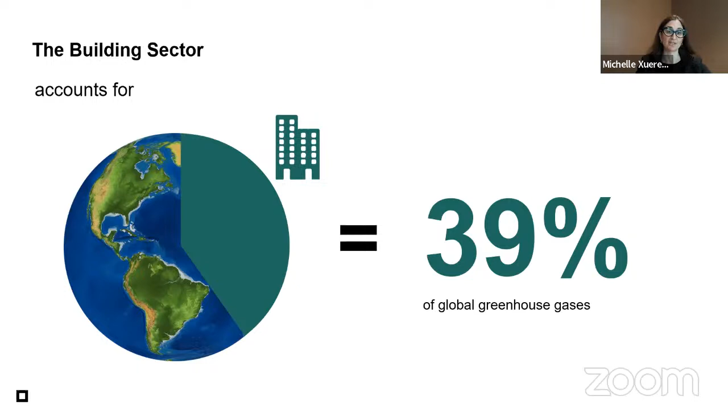Okay, good morning. You can see what I'm going to talk about here. Naama's already mentioned it, so I'll just get right into it. We know, being in the building industry, that what we do accounts for a huge amount of global greenhouse gas emissions. Buildings account for 39% of global greenhouse gas emissions, and 11% of that actually comes from embodied emissions. I'm going to park that for the moment.

Looking at what the World Green Building Council thinks we should do about this: their idea is that all new construction should be net zero operational carbon, that's the carbon it takes to run the building, by 2030. They also want to see a 40% reduction in embodied carbon, which is interesting because we haven't really been talking about embodied carbon until maybe the past 2 years, at least widely. Then by 2050, they want to see 100% of buildings, both new and existing, to be net zero operational carbon, which is just, wow, that's a lot. And they want 100% of new construction to be net zero embodied carbon. So that's a tall order.

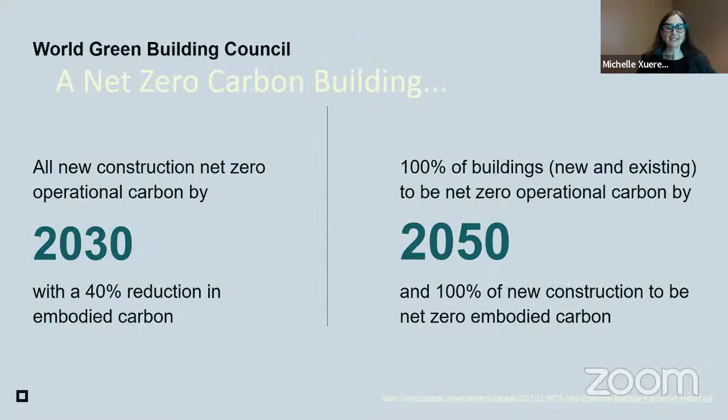So let's talk about this idea of a net zero carbon building and what that actually is. A net zero carbon building is a highly efficient building. What you want to do is produce renewable energy on site, or purchase that, or do a high quality carbon offset, and that's what's being permitted for the moment. You want to make that equivalent to what you're using, and you want that to be both from your operational carbon to run the building and your embodied carbon. So just a sidebar: embodied carbon is the emission associated with the materials in the construction process, and I'll get into more detail about that. Operational is the emissions associated with running the building itself.

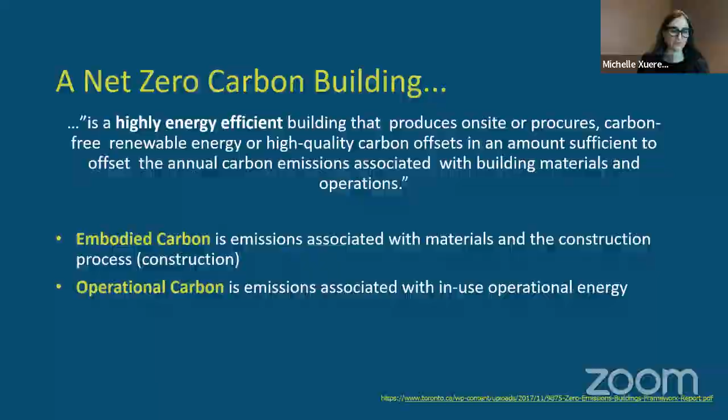So let's look at that visually, since we're very visual people. Net zero emissions means taking your embodied carbon, which is from the materials it takes to build the building and maintain it over its lifetime, and adding that up with your operational carbon, which is the carbon it takes to run the building - the fuel, that's the carbon emissions from the fuel to run it. Then you subtract from that the avoided emissions, which is your green power or any kind of carbon offsets. The idea is that you net out to zero. That's kind of the definition from the zero carbon standard from the CAGBC.

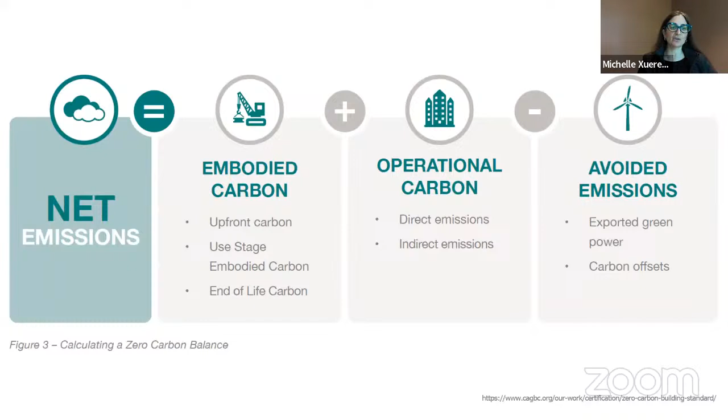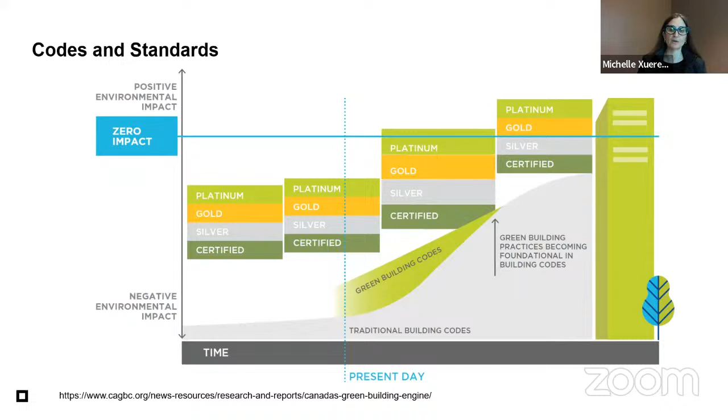Big picture, metrics to measure success in buildings are changing. What we have seen is that changing codes and standards have really given municipalities and regulatory bodies the confidence to go ahead and embrace higher levels of sustainability. So what we're starting to see is a push, kind of an upward cycle of increasing those mandatory requirements, and that has been ongoing and will continue to be.

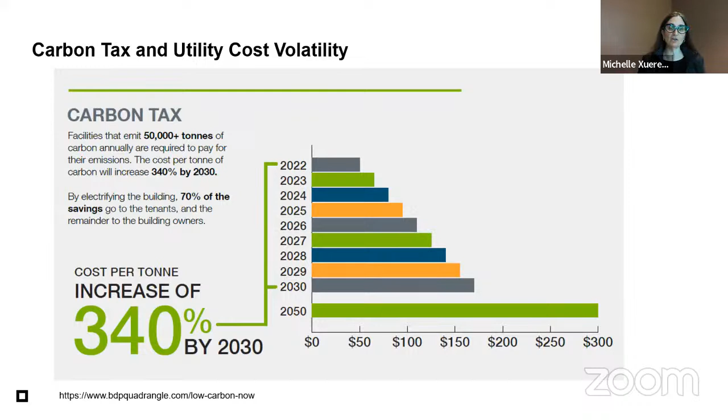The other thing we've seen is some volatility in the utilities we're paying, whether that's from global unrest, things like the war in Ukraine, or from trying to deal with climate change. We see tools like the carbon tax that have come into effect, where the cost of carbon is set to increase by 340% by 2030. So that's pretty significant, we're going to see big changes here. All kinds of indicators are pushing us in the right direction to take this seriously, even if the regulation isn't totally keeping up. And then you've got things like ESG reporting, which is really about investment. So if you're in a REIT, if you're dealing with pension funds, this has all become a part of it.

And it's something that has become tied to financial reporting. The governing bodies, the global governing bodies, are working to align the reporting of environmental and social governance against financial. So this is very important.

This is a huge regulatory piece that's underway globally. There's been some pushback in the US, but it's really taking shape in Europe. Then we see things like this building in the UK, which part of why the project was rejected was because of its embodied carbon. And I thought that was really interesting, because it's telling me that even if there are minimal requirements or no requirements, it's becoming increasingly risky to ignore these things.

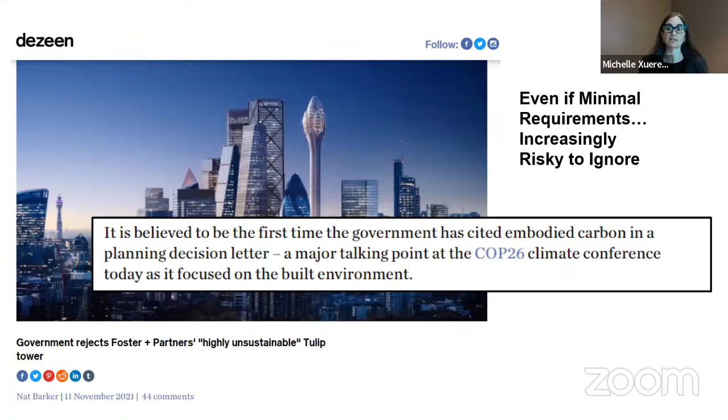So let's look at some of the response to that. You get things like green development standards. After signing the Paris Agreement, municipalities have been charged with reducing their emissions. This is something that came from the Atmospheric Fund when they did the carbon inventory of the Greater Toronto Hamilton area.

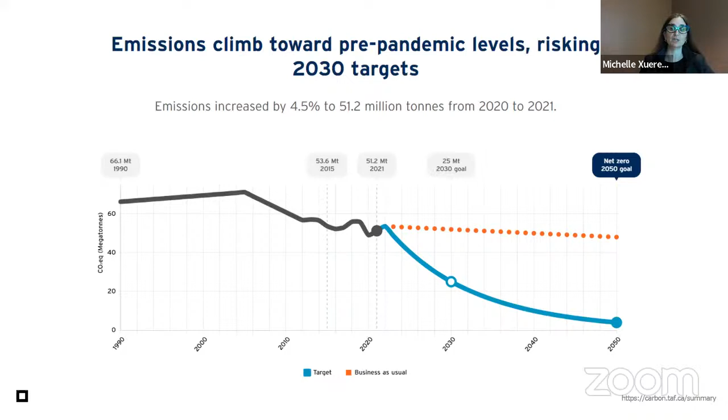You can see here that red is business as usual and blue is where they want to go. So what the municipalities are working to do is close that gap. And in a city like Toronto, where you have more buildings, the carbon impact is even higher. So what you get is a bunch of green development standards, and all of these municipalities have them.

But the one that's really been leading the way is the Toronto standard, which was based on the zero emission building framework issued in 2017. This was a pretty interesting piece in that they created almost like steps for how we're going to get to net zero, and I'm going to talk us through that.

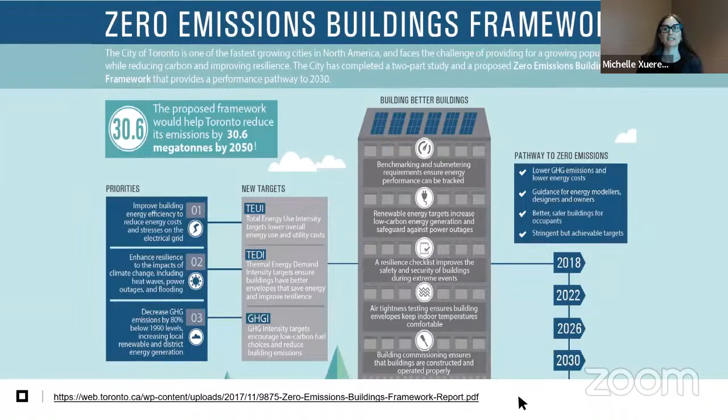So they created these absolute metrics and some other additional measures, and I'll walk it through. We're in Toronto Green Standard version 4. There have been 3 versions so far, so I know there's lots of confusion about the Toronto Green Standard. It came out in 2018, we were subject to version 3, and there were 4 tiers.

In May, we moved down to what was mandatory now dropping off, and what was optional has now become the mandatory standard. So what you start to see is over the years, the lowest level starts to drop off, and you start to increase your requirements, so that by the time we get to 2030, the only requirement will be net zero buildings. And then they went a step further and sped up the timeline.

They said, okay, by the time we get to version 5, that's in 2025, and we want net zero by 2028. So what does that look like?

So if you're working on a project right now, the light gray and the dark blue are sort of pre-design, schematic design. If you're going in for your SPA application, which is what TGS is tied to, when you get to that, you may have already been working on the project for a couple of years. So it's really important to understand where these steps are going, so that something you're working on now, you can be planning ahead for where it's going.

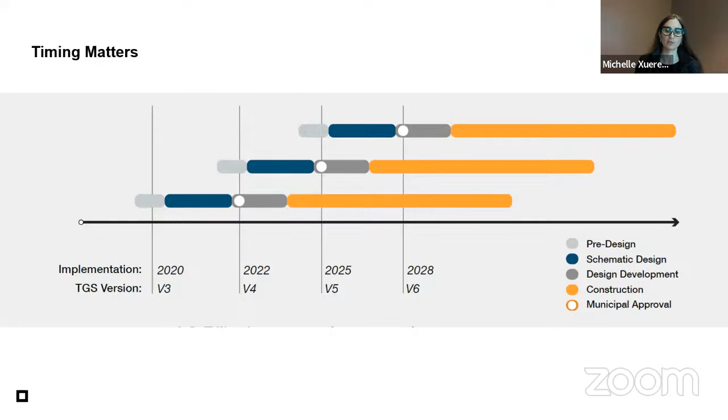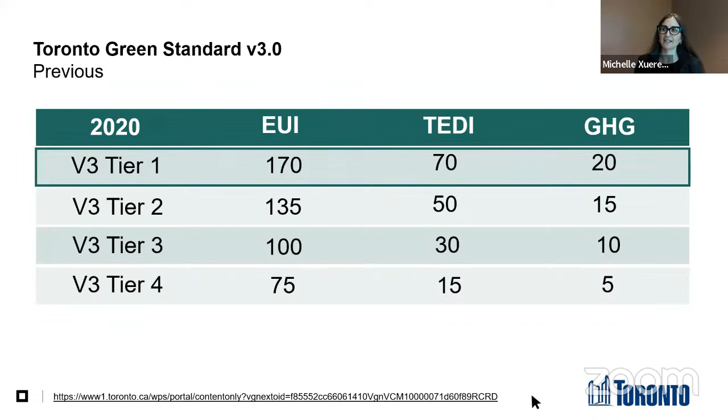So what about financial implications? There was a study done in 2017. This is fully about multi-unit residential buildings, and they were comparing to the building code. Now we're at version 4. So basically they were saying this is what's required, and this is about 3.5% more than what it cost in 2017.

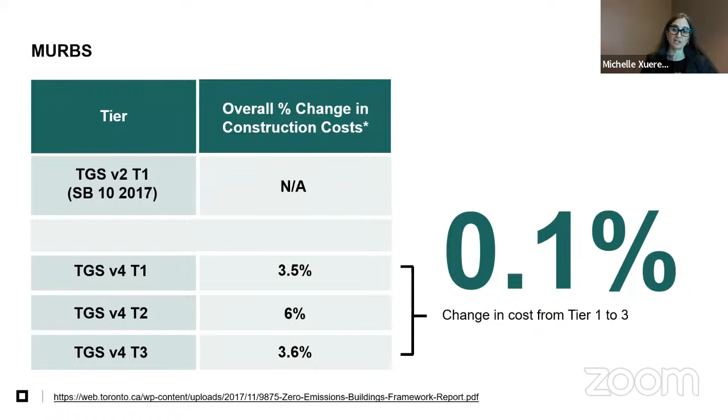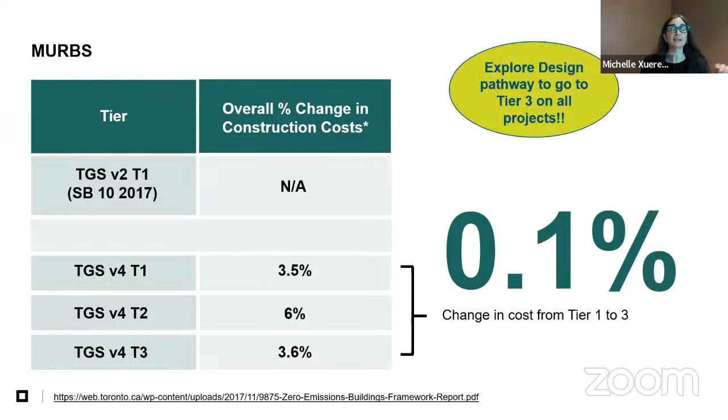This does not deal with escalation, just putting that out there. And the thought was that when they looked at it in 2017, getting from what is now tier 1, which is mandatory, to what is tier 3, which is voluntary, had less than a 1% difference in cost. So I find that very, very interesting, because it tells me that where we're at right now, we should be exploring the design pathway to go all the way to tier 3 on every single project, regardless of whether you're going there.

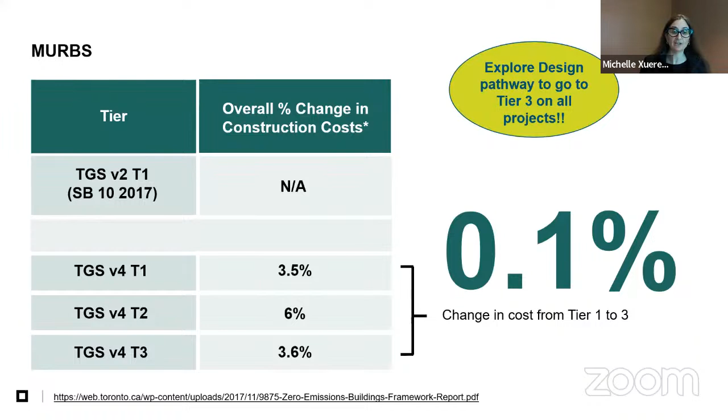Exploring that pathway is really, really important to help people understand where it is we're going to end up.

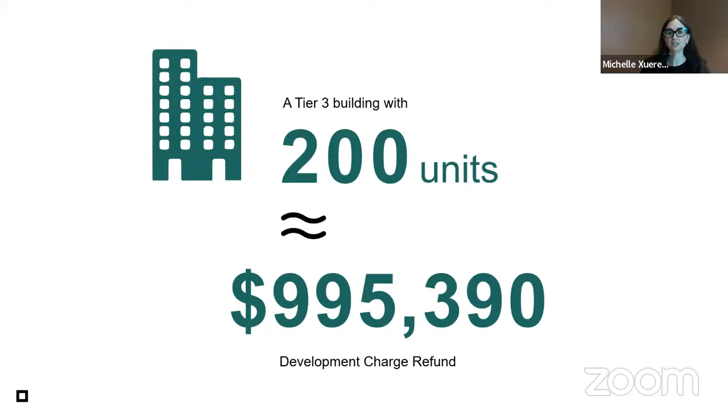Now the other piece that happens is development charges. Let's say we're looking at a 2-bedroom unit, you'd have to pay $55,000 in development charges. If you go for a higher level of performance, you'd get $4,000 or $5,000 back, depending on the version. For a tier 2 building with 200 units, that amounts to $829,000. Not insignificant. And if you go to tier 3, which is the one I'm recommending we explore, you're almost at $1 million in development charge refunds. So, money to be taken seriously.

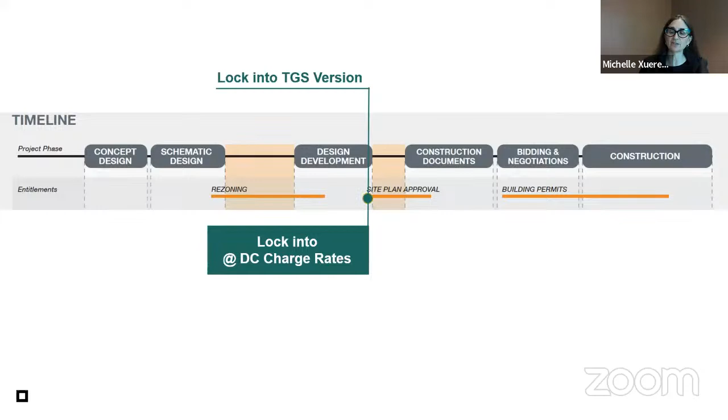So what does that look like on a design timeline? You lock into your version of the Toronto Green Standard when you apply for site plan application—that sets the rates you have to pay, your development charges. You pay those when you go in for your permit, and then you receive your development charge refund back at the rates that are current when you prove compliance to construction.

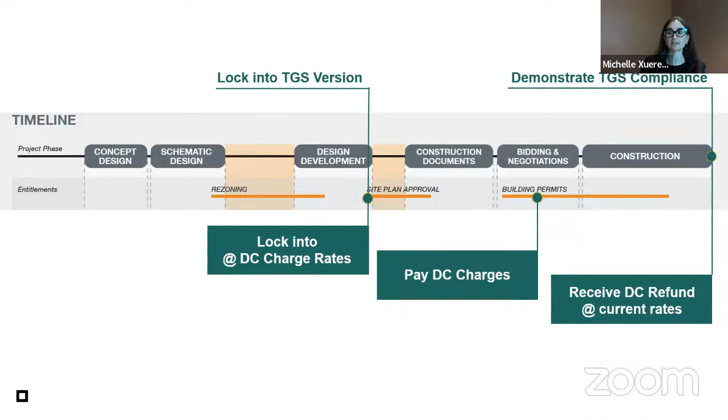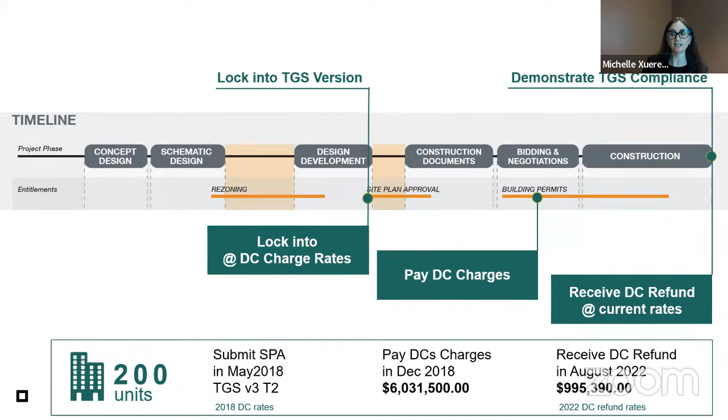So back to our 200 unit building: if you had submitted for SPA in May of 2018, you'd be subject to your version 3 costs. Your development charges would be around $6 million, and you'd receive your refund of close to $1 million in August of 2022. Not an insignificant percentage of what you're already paying.

When we expanded that search to look at even higher performing projects, things like Passive House or the Zero Carbon Standard, we found only about 5. And those were really in the affordable housing side or in the university market. Again, kind of interesting.

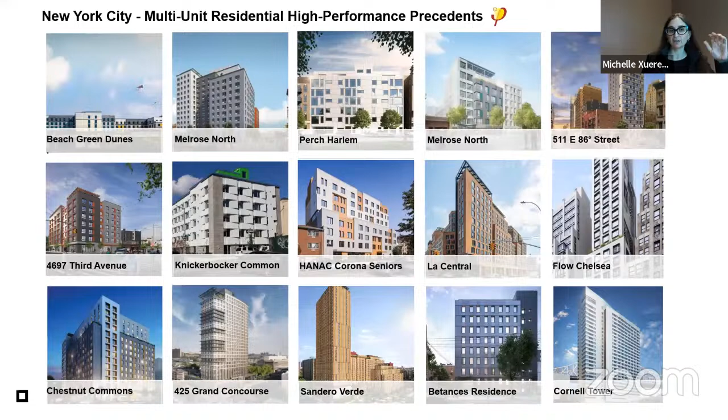Now where I thought it was really interesting was New York City. This is where we're starting to see the first real wave of high-rise passive house towers—a whole bunch where you can see the architecture overwhelmingly starting to change: punched windows, no balconies. Since Hurricane Sandy, New York has been really advanced and proactive in moving their environmental performance requirements ahead. They've now put in this local law 97 that sets emission targets for buildings and requires people to report out and pay the difference. They're given a limit to how much they can use, and they have to pay for every bit they go above. Signs of things to come.

So we put together a little think tank to discuss how we were going to accelerate net zero with this group of companies, because there was a lot of frustration—why can't we make this happen faster? We said, what if we put together 3 steps you can do on every project? So we put together this study called Low Carbon Now, where 8 companies got together and shared what they would do. We made a short video and an infographic, which you're welcome to check out after.

One of the things was really about this decision-making process that happens right at the beginning, which is so challenging on residential projects given their stop-start nature. But we do know that any decisions you make in this upfront planning process set the carbon trajectory for the building for its lifetime—what it's going to be in embodied carbon, what it's going to be in operational carbon, shown in blue. So try to make those decisions wisely at the beginning. This graph also demonstrates the time value of embodied carbon.

Usually you talk about embodied carbon over the life cycle of a building. If you looked at it over 60 years, it would maybe be sort of 40% of the total carbon of the building. But if you look at the fact that we're trying to reduce our emissions by 2030, just looking at that time span, embodied carbon emissions are actually valued at about 85% of the emissions. So as we're building these buildings, they have a massive impact.

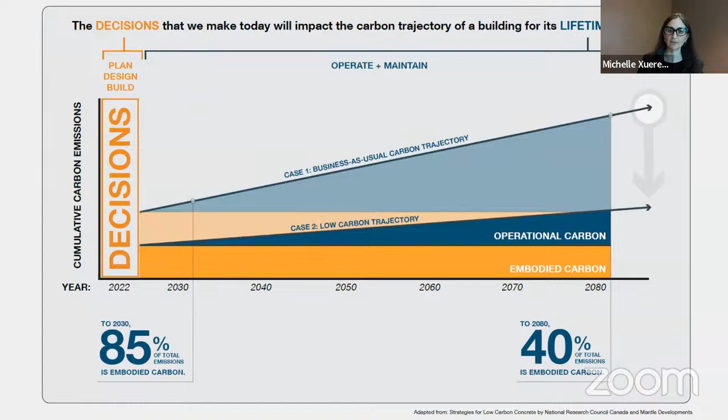So the 3 things we said we should do for low carbon buildings: 1, build smarter structures; 2, prioritize the building enclosure; and 3, electrify your heating systems. We're going to get back to that.

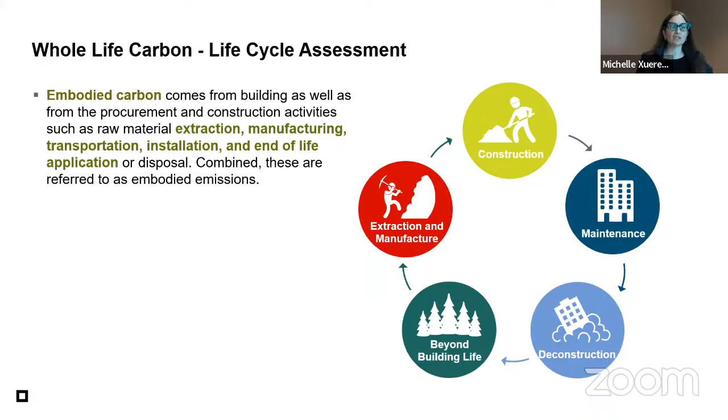Let's talk a bit about embodied carbon. It really comes from the materials through their entire life cycle, through extraction, manufacturing, transportation, installation, and what you do with them at end of life. You've probably seen these charts before, they can be quite confusing - people talk about A1 to A3 to A5. We did a range of studies that are really just about this front end, the product and construction phase, knowing that the majority of embodied carbon impacts come in these first phases.

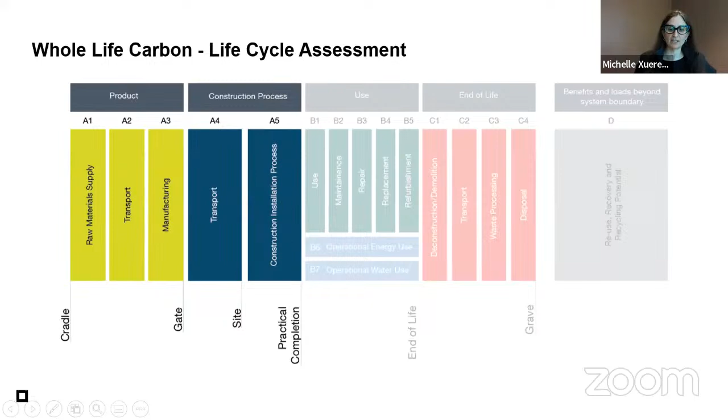We've only been having this conversation really widely as an industry for maybe the last 2 years, and tons of literature has been published about it, which I find really interesting and exciting, because we're realizing that embodied carbon is actually the elephant in the room.

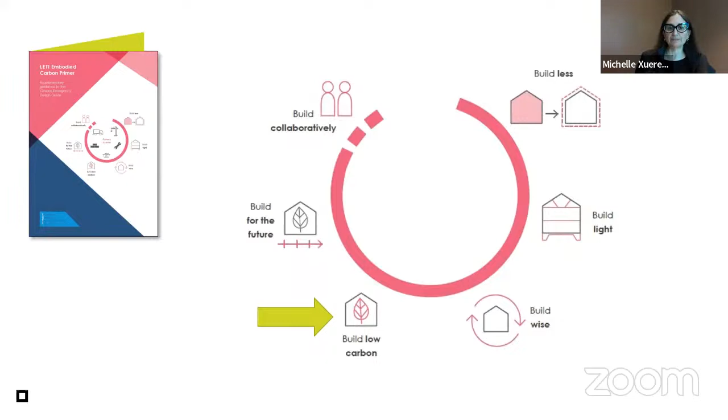Probably the most advanced, in my opinion, has been LETI, put out by the City of London - the London Energy Transformation Initiative. This is an amazing guide. They've set benchmarks for all buildings in London and things to do, and are working on adjacent legislation. One of the pieces: build less, build light, build wise, build low carbon, build for the future, and build collaboratively.

So one of the things that happened here in the City of Toronto is we pulled together a group of people that said, well, we need to look at what are the benchmarks. We keep saying a 40% reduction in embodied carbon, but 40% of what? So Kelly Doran had done a studio for University of Toronto, one of our projects was part of it. We took the results of that, went to speak with the City of Toronto, along with Mantle Developments, and managed to secure some funding from the Atmospheric Fund for the City of Toronto to do a benchmarking study of buildings in Toronto.

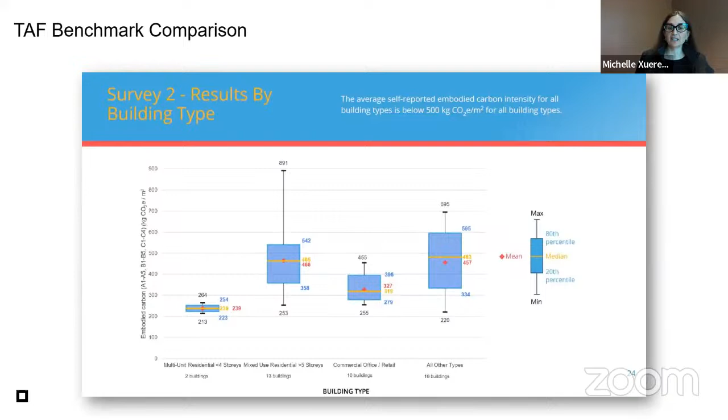What they found was they did a call out to many practices within the city to ask, have you done any embodied carbon studies, any LCAs, and can you give us the results? They took that and benchmarked the median. Out of that, they provided this regulatory embodied emissions of buildings - a policy primer for municipalities to talk about how they might go about regulating it.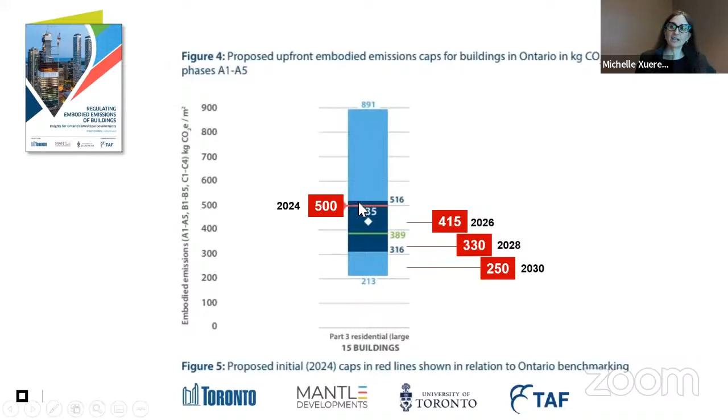And what they did is they set caps. They said for 2024, we should have a cap of 500 kilos of CO2 equivalent per meter square. But not just that - we want to reduce that number to 415 by 2026, then again by 2028, then again by 2030. So here's the average right now, but really quickly bringing that number down.

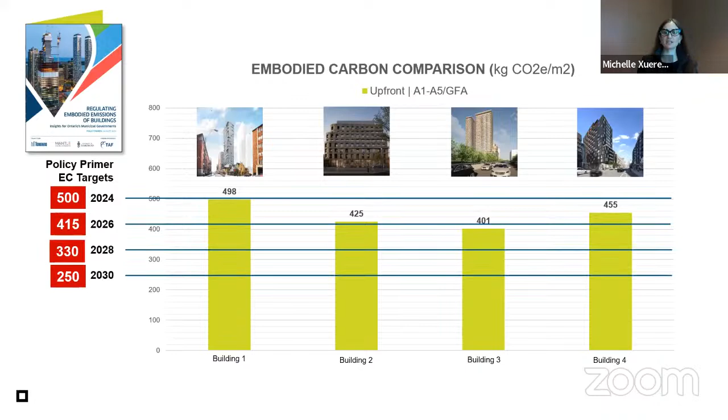So we've been doing a whole bunch of embodied carbon studies within our own studio. Here are the results of 4 buildings - we've done more since then - and you can see that they sit kind of comfortably below that 500 number. But then you start to drop it by 2026, by 2028, by 2030, and you see how significant, and how we're going to have to really start to rethink the way we're thinking about our buildings.

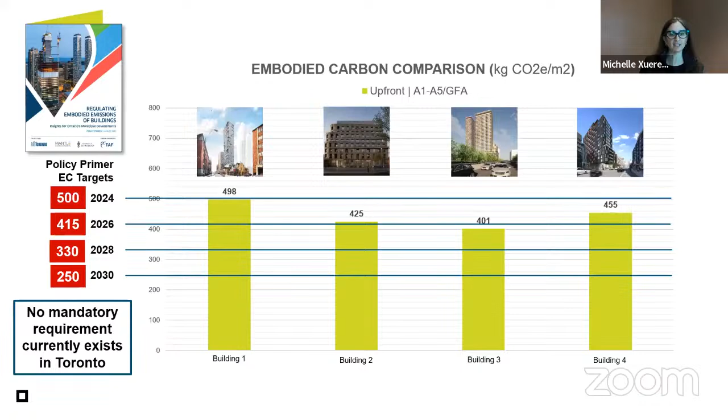Now, there are no mandatory requirements currently in the City of Toronto. I do expect that to change. At this point, this is really the recommendations in the policy primer. So how do we go about doing this?

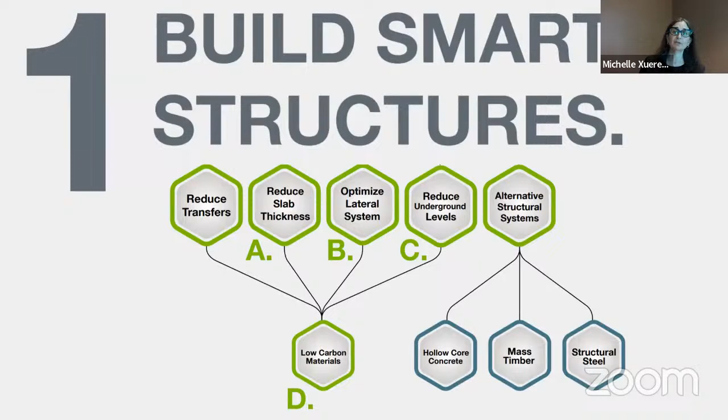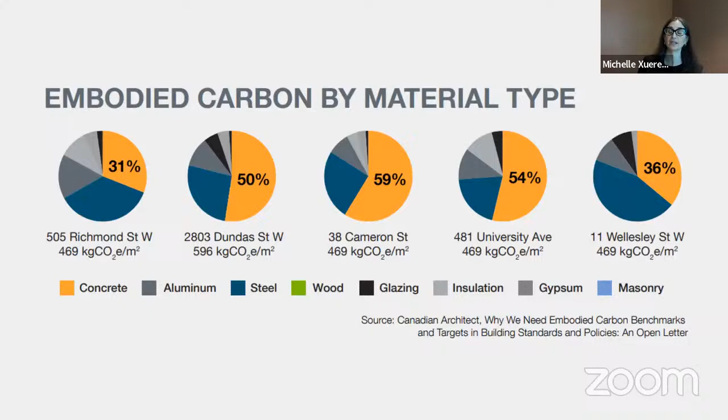So we said, number 1, build smarter structures. These are some of the results of projects done with the U of T study. There was a great article in the Canadian Architect about this, where they looked at where the emissions sit - this orange is the concrete, the blue is the steel. If you look at that, the structure of the building takes really 75 to 85% of the embodied carbon. So it's really starting with the structural engineers. We worked with Entuitive Engineering, and they produced this.

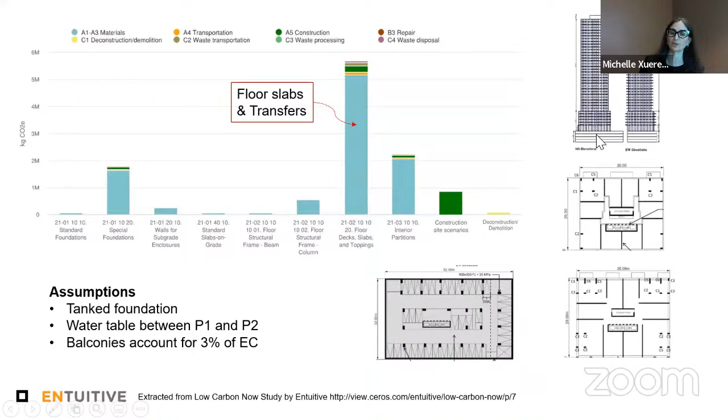So we did a 40-story archetype tower with 4 stories of underground parking, and asked where the embodied carbon sits. The big chunk is in the floor slabs and transfers, another big chunk in the shear walls, and the rest in special foundations.

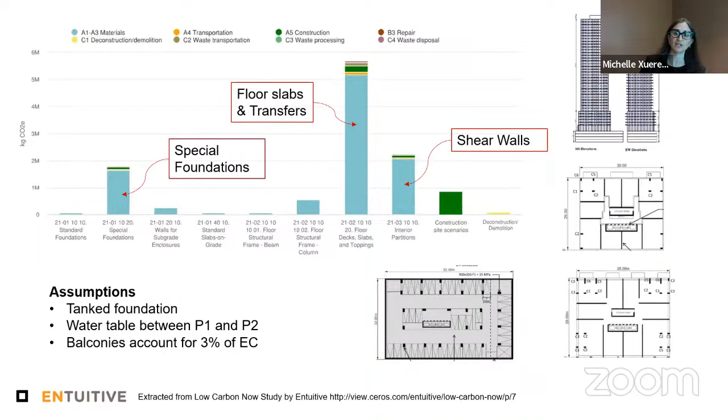So we did some optioneering and said, if it mostly sits in the slabs, how could we create this differently? We looked at our 200 millimeter standard reinforced slab and compared it to things that were achievable, like what they do out west. They have a reshoring technique that would allow us to bring that thickness down to 180 millimeters, a 10% reduction, or even looking at post-tension slabs.

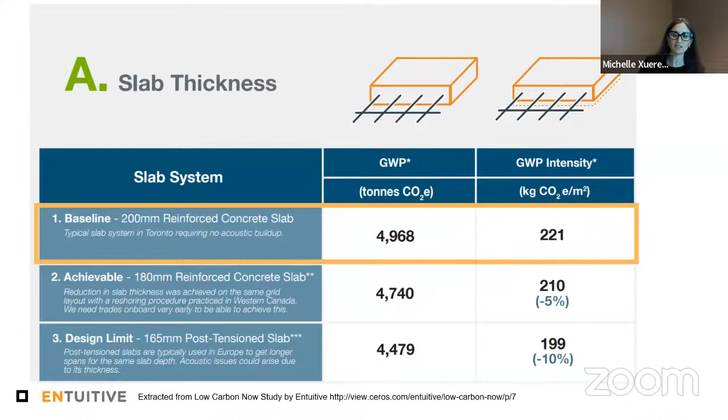This was from one of our partners at Multiplex who'd done a lot of work in the UK where post-tension slabs are common, and that was a 10% reduction. Easily right now we would stick with what's here, but hopefully eventually we can move to these higher levels of thinking about it.

Lateral systems in these buildings, we tend to do shear walls. If we move to something like wallumns or discrete columns, you can then get a 6.2% reduction. Again, pretty significant and very possible with our forming techniques now.

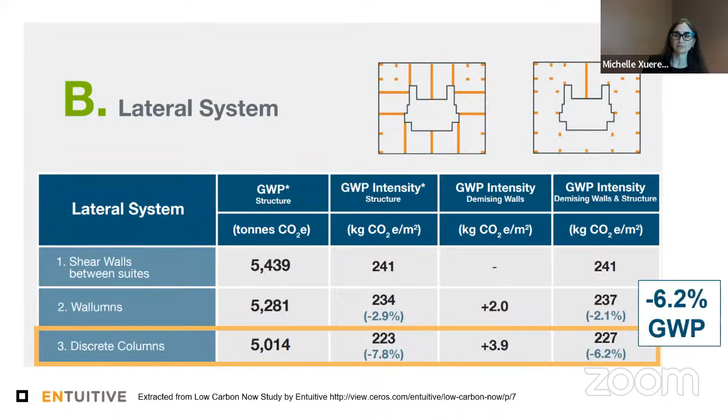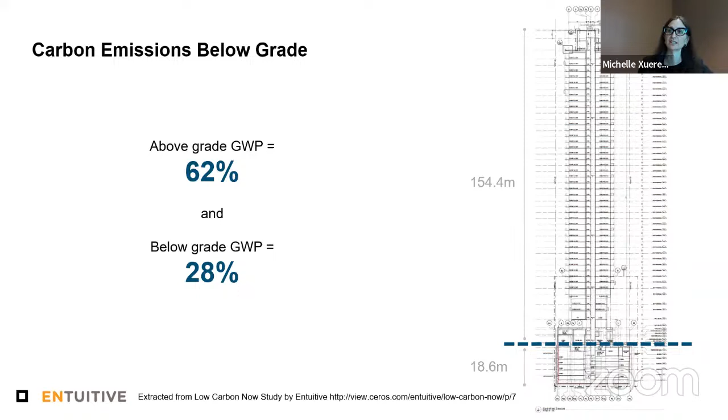The other big spot where we found embodied carbon is below grade, and a lot of this has to do with where the water table sits. So for our Archetype project, about 28% of our embodied carbon emissions were sitting underground.

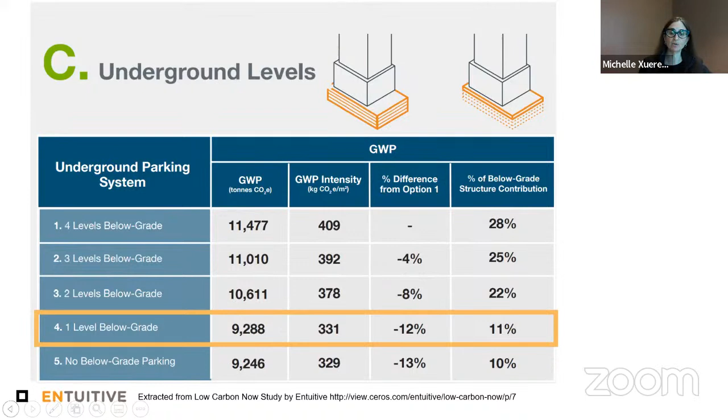So it stood to reason that we would look at what it would take to go from 4, 3, 2, 1 down to no parking below grade. What was really interesting was that the difference between one level of underground and none was only 1%, but we could achieve significant savings of 12% by going down to just one story.

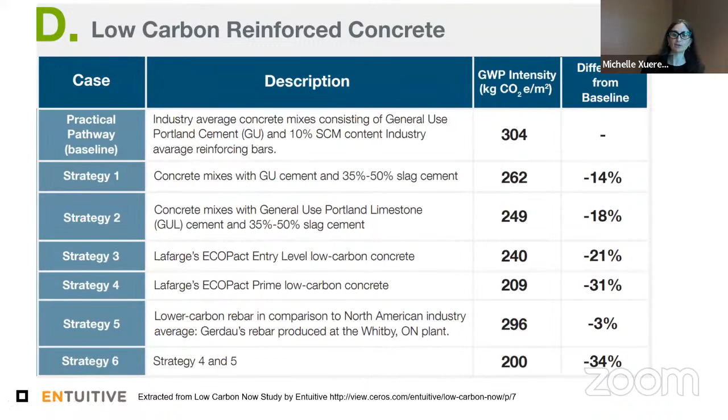From there, we've reduced the volumes of our material. The next thing is to look at the materials themselves. We looked at different kinds of cement and rebar and came up with a further embodied carbon saving to get the structural number down to 200 - another 34%. This will all come through on the procurement side.

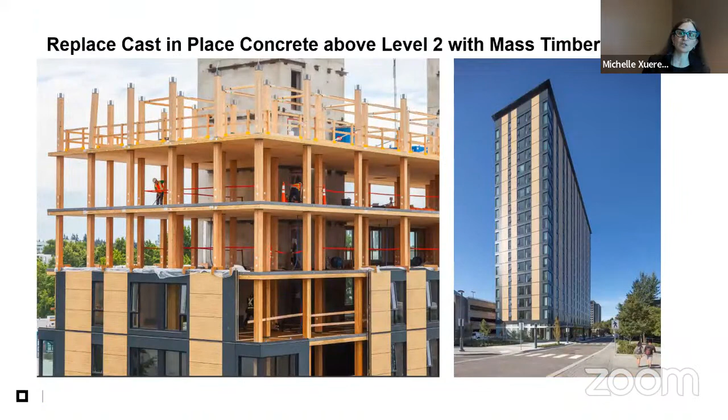So pretty important. And then of course there's the shift to mass timber. If you're looking at a cross-laminated timber floor assembly, including the layers you have to put on for fireproofing, it's still a quarter of the embodied carbon per square meter compared to a concrete floor assembly.

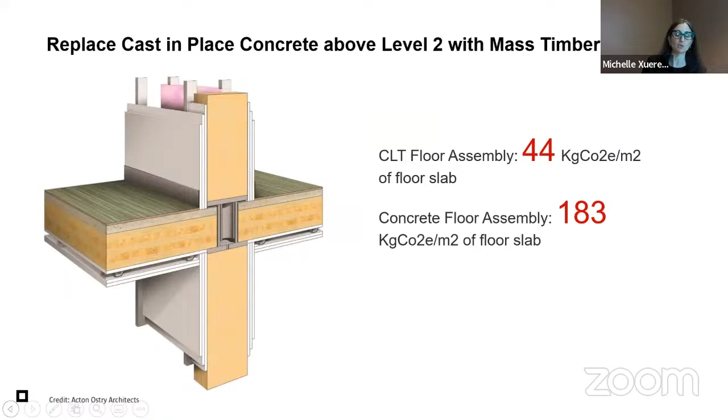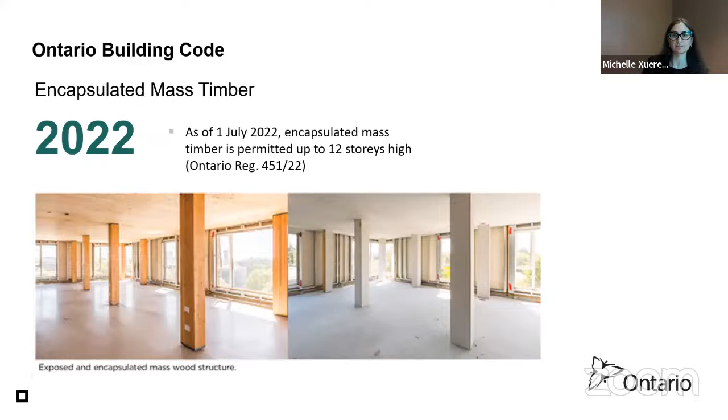Quite significant. Given that the Ontario Building Code changed in July of 2022 to allow encapsulated mass timber, I trust we're going to see a lot more of these coming in the next couple of years. So on the structural side, really having these conversations early, simplifying the structure, and minimizing or eliminating transfer structure and minimizing your underground is extremely important.

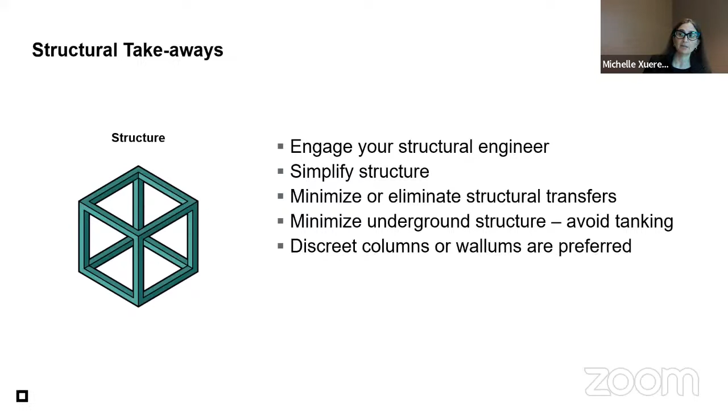Prioritizing columns or wallums over shear walls, and then using low carbon materials.

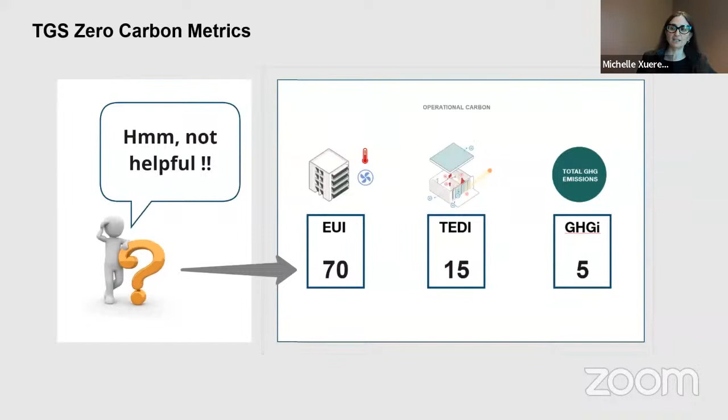On the operational side, talking about enclosure, a couple of key pieces. I showed you those numbers at the beginning - EUI, TEDI, GHGI. I'm just going to tell you a little bit about how those work.

Energy use intensity is the total amount of energy that your building uses, and it's really about reducing that demand. So what are you using that energy for?

Then you've got the TEDI, which is about your thermal energy demand - so that's about your heating. What are you heating? The strategy for that is really around optimizing your enclosure: lowering that window-to-wall ratio, simplifying your glazing so you don't have as much thermal bridging at your mullions, simplifying your form to make it as compact as possible, and doing high quality rain screen cladding, prioritizing moving that insulation to the outside.

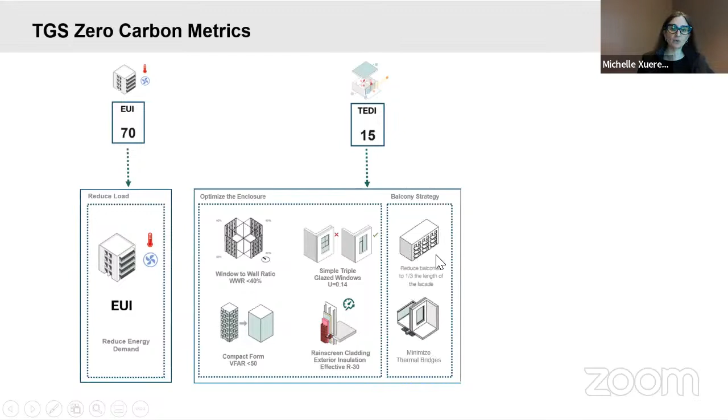And then in multi-unit residential, the other part of the enclosure is the balcony. Really reducing the amount, thermally breaking them if you are providing them, or eliminating them altogether. It also has to do with heat recovery and ventilation - those are the big things that affect the TEDI.

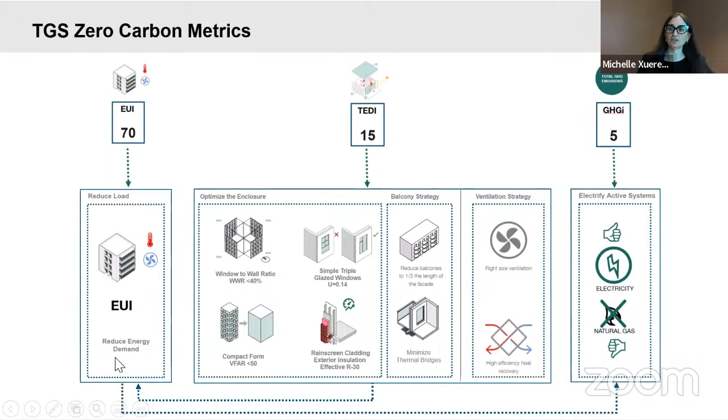And then in terms of greenhouse gas, it's really all about fuel switching to electrification. So you bring that TEDI down by doing an enclosure-first strategy that reduces your load for your EUI, and that in turn starts to make your electrification make more sense.

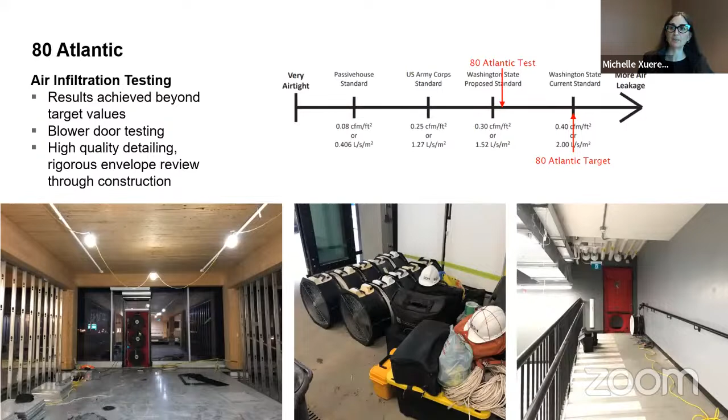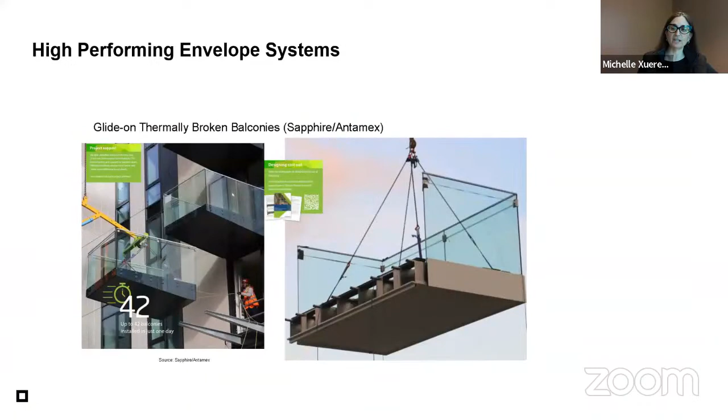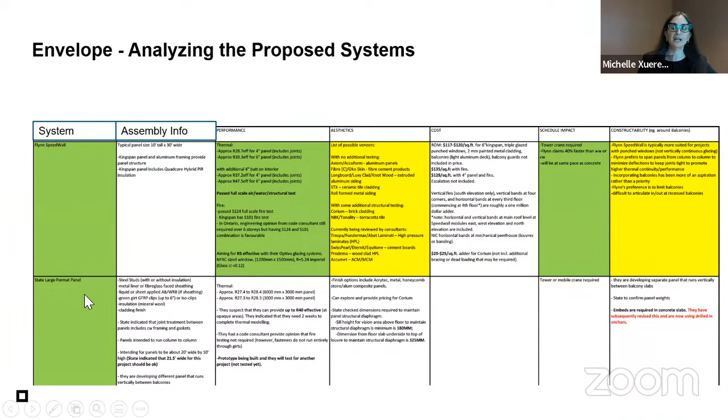We did have a project where we did air infiltration testing on 80 Atlantic, and this is another piece you're going to see coming up quickly on these kinds of buildings, especially as we move into passive house, super insulated walls, and high performance, large format wall systems—looking at ways to replace how we build now, like glide-on thermally broken balconies. On a project with a bunch of different partners, the contractor put together this spreadsheet looking at the system, the assembly, performance, aesthetics, cost, schedule, constructability, and carbon, comparing all of these together to make wise decisions.

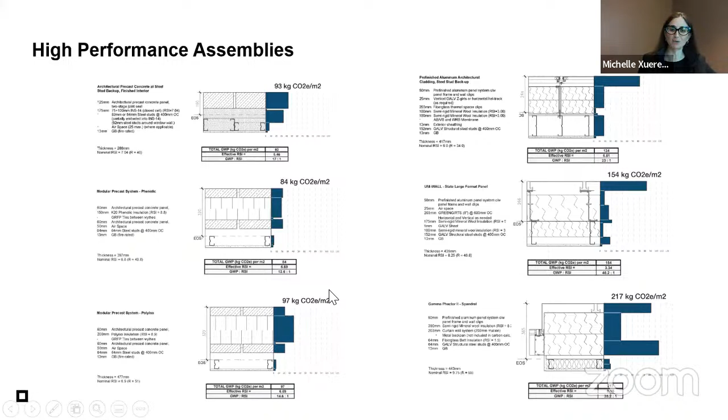So here we've taken these high performance systems. On the left-hand side we have their effective RSI value—other than this one, they're all pretty similar in terms of thermal performance. But on the right side we have the global warming potential, or embodied carbon, and you can see they're not all created equally. Looking at high performance curtain wall, it's a very high ratio because the embodied carbon of the material is so high compared to this architectural precast panel.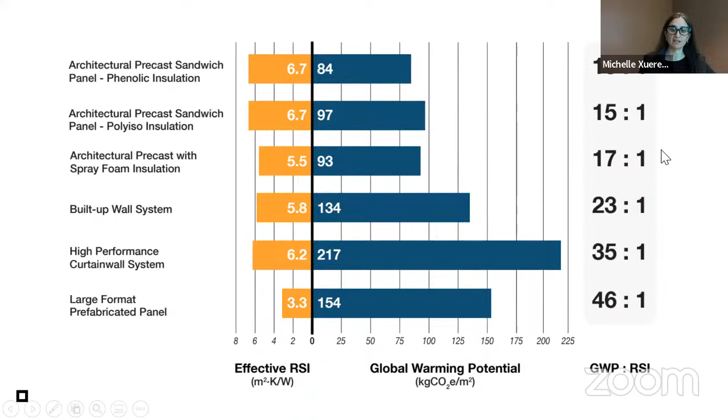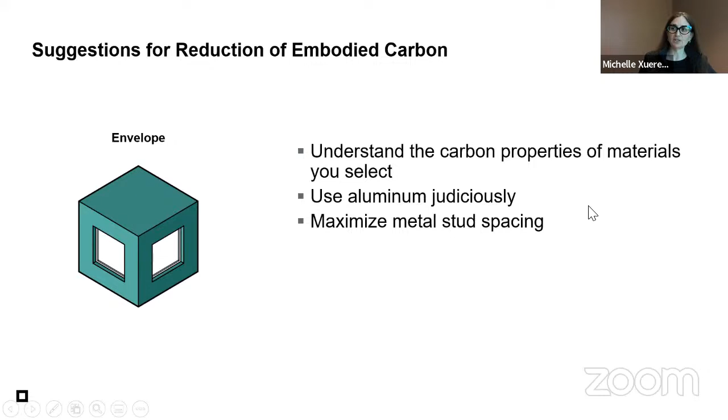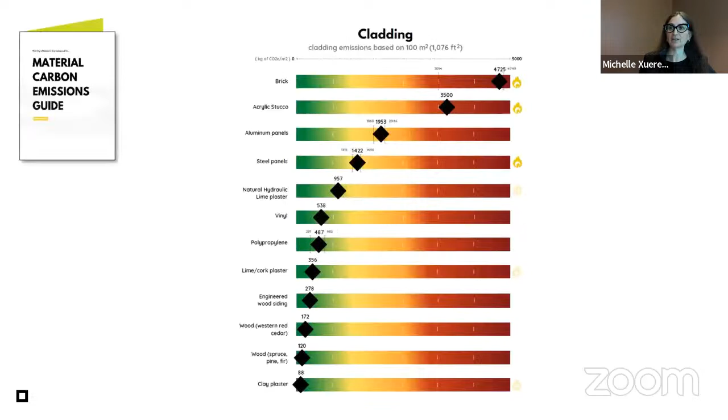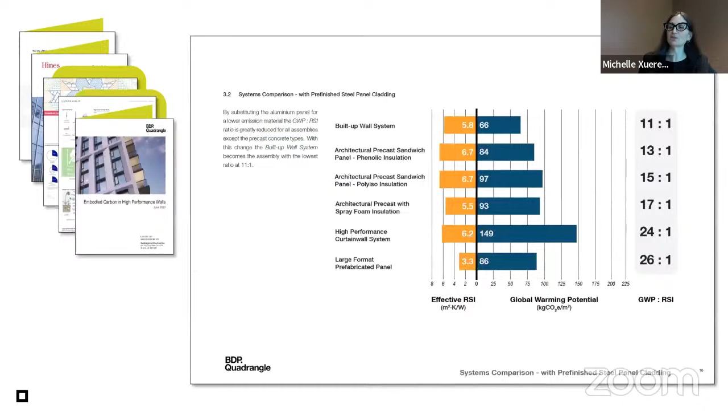On the envelope side, it's about understanding the carbon properties of the materials, using aluminum judiciously because it's the aluminum that pushes those numbers up, maximizing your stud spacing, specifying low carbon insulation, and considering that ratio between global warming potential and RSI. There's tons of material out there—City of Nelson put this out, another one by Hines, one called Kaleidoscope, and this is the BDP Quadrangle one.

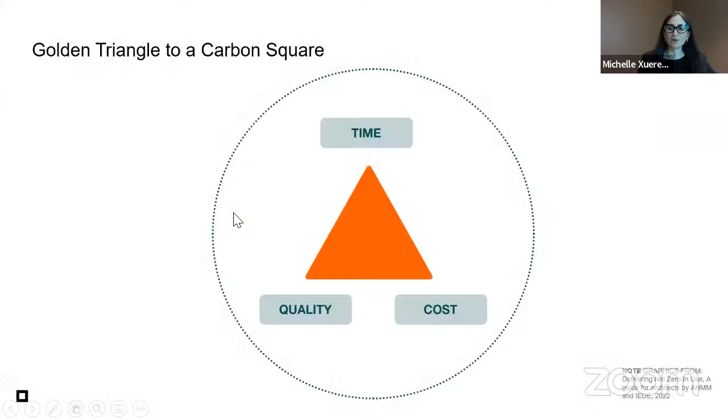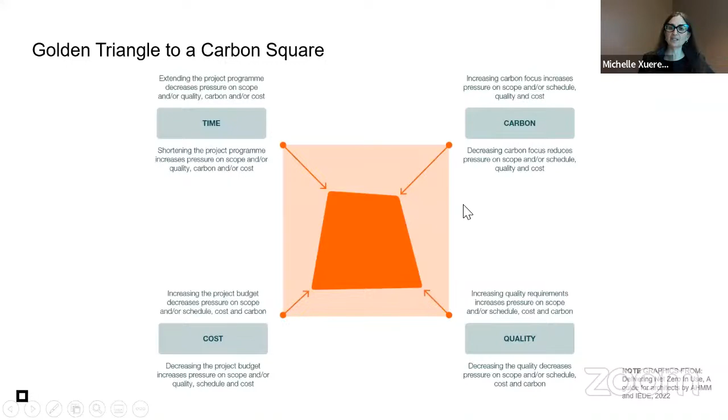Moving to electrification of systems, I'll keep it brief and skip past that. So going forward, we're used to talking about time, quality, and cost. This we thought was great, where they added one more metric to this, which is carbon—we have to be thinking about carbon at the same time as we're making decisions about time, quality, and cost.

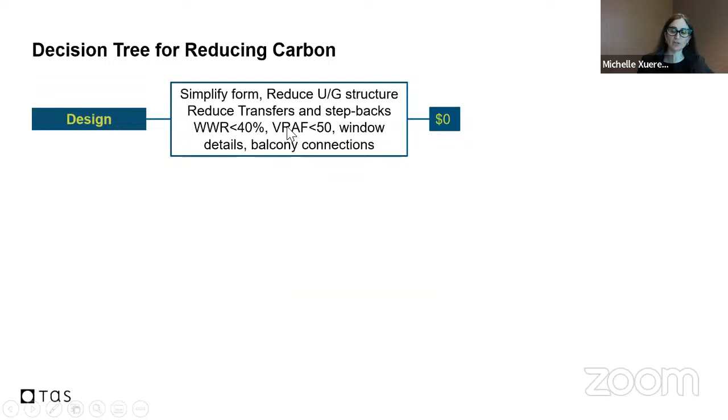In terms of your decision tree, so much is generated from the design itself: reducing your underground, reducing transfers and step-backs, keeping that window-to-wall ratio low, and your ratio of vertical to horizontal. From there, moving to innovation—mass timber, 2D, 3D modular, clip-on balconies. Usually those things cost a little more, so the question is, does it create other benefits for the project? Does it de-risk other things? If yes, go for it, invest in those things.

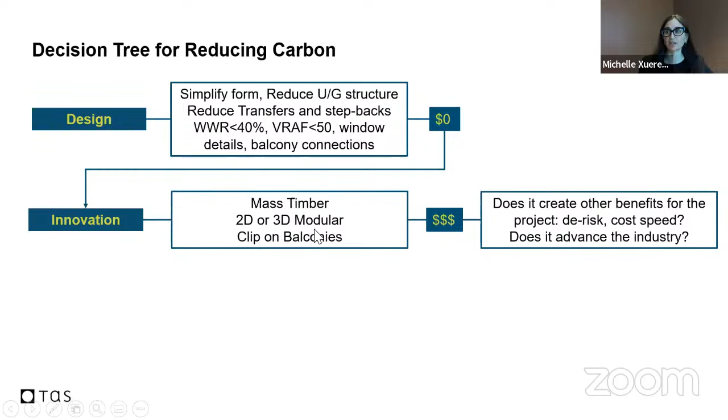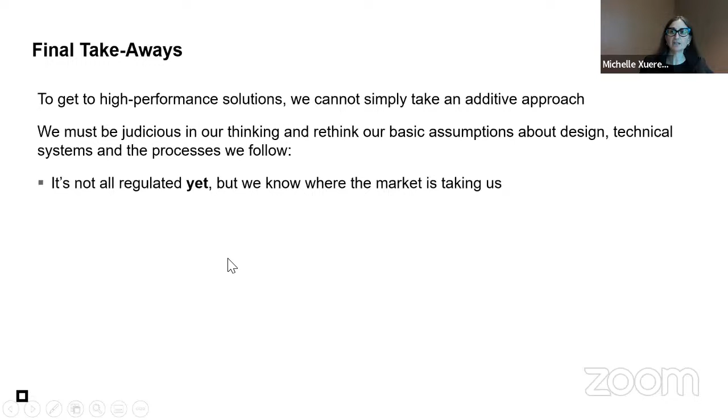If not, then you need to think about procurement—procuring low carbon materials, especially for concrete, steel, and aluminum. Final takeaways: to get to high performance solutions, you can't simply take an additive approach to the way we've been doing things. We really have to be judicious in our thinking, rethink our assumptions about design and technical systems and the processes we follow, because it's not all regulated yet, but we know where the market's taking us.

We have to question business as usual, even if it's not regulated, and engage technical subject matter experts, contractors, and consultants early in those integrated discussions, trying one new thing on every project. Use embodied carbon tools—there are so many of them—to measure performance as you're designing. And finally, investigate what it takes to get all the way to net zero, and chart that path, even if you're not going to use all of them in this project immediately. I'd encourage you to check out Low Carbon Now if you want to see more of this. Thank you.